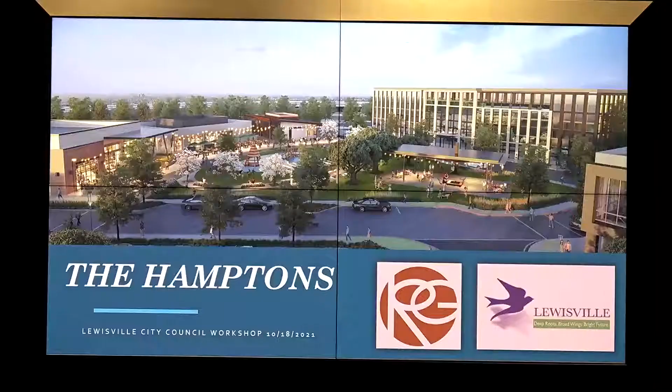The Hamptons, if you guys don't know already, there's a t-shirt going around that says Lake Lewisville, the Hamptons of Dallas, so it's kind of tongue-in-cheek, but it's already got built-in marketing for that.

And the other part of that is, as you'll see with a lot of the developers in this Northern Gateway, they have a desire to tie into the lake and the lake project that's happening just nearby. So on the Northern Gateway, just a reminder to council of all the different projects currently in the works, as well as to the public.

So you probably can't read this very well, but in the blue, that is what council is aware of as Frontera. That is a master plan community that is going to be 759 multifamily units, 201 townhome units, and commercial along the freeway with a nice amenity area with a lake.

You also have on the corner, which I'm not sure council knows about, but we have gotten plans in for a Gas Monkey. What that is going to be is an outdoor amusement facility. They're going to reuse that facility out there with the go-karts and make it even bigger and better. So that will really activate that area from a family entertainment standpoint.

And then obviously we have Heritage Trails, which is the multifamily as well as townhome development, as well as Nora that's going in. In the yellow, we have some future commercial that will tie in nicely with our site. And so that really left us with the site that was sitting right in the middle of all this opportunity.

Now, the problem with that was that after COVID, we had a big spike in prices for industrial property. And so this property was already zoned light industrial, and the owner at the time felt it was in his best interest, even though he had previously taken part in the Northern Gateway plan trying to make this a walkable urban village, decided it might be in his best interest to sell the property for industrial.

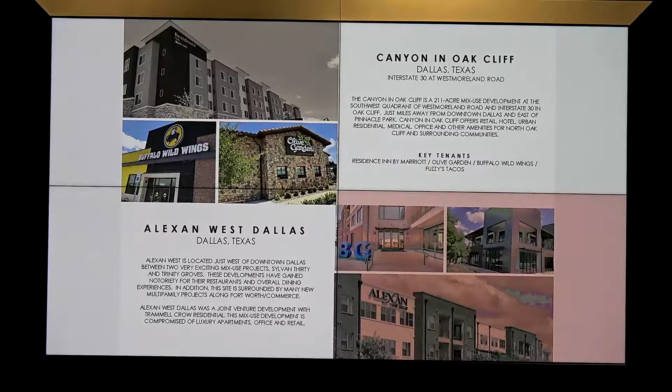Some of the projects that we have completed or that are underway include the one I mentioned earlier, the Shops at Redbird, which is a $200 million redevelopment of the former Southwest Center Mall in Dallas. Glen Oaks Crossing, which is a Walmart anchor center in Dallas. The Canyon is a 211-acre master plan mixed-use development that consists of hotel, residential, restaurants, and retail. The Alexan West Dallas was done in partnership with Trammell Crow, an urban mixed-use development.

Center City is in the city of DeSoto, a Tom Thumb anchor center with some quick service restaurants. Richardson Square is a mall redevelopment in the city of Richardson that's anchored by Target. Eldorado Plaza is located in the McKinney market, anchored by Trader Joe's and a couple of select service hotels. Red Oak Crossing is a Walmart anchor development in the city of Red Oak.

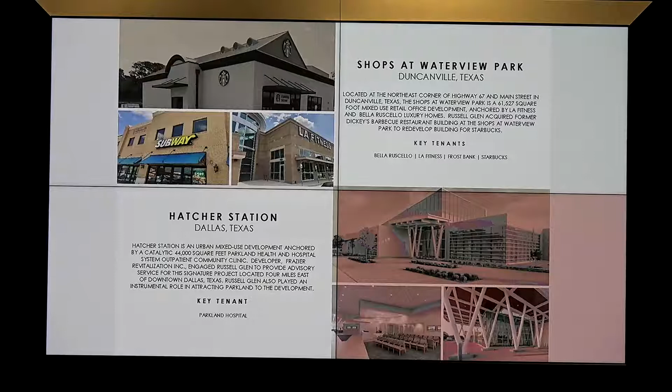A couple more here, then we'll move on to the plan for Lewisville. The Shops at Waterview Park is in Duncanville, a mixed-use development with urban residential, LA Fitness, restaurants, and retail. Hatcher Station is a Parkland Medical Center anchored building. We were partners with Matthews Southwest on the Omni Hotel project in the city of Dallas. And in my previous role, I was director of real estate for Panera Bread and Pei Wei restaurants.

So we have structured a purchase agreement for this property. As council had directed, the desire was for us to find a developer who was qualified and met the vision of council, and we'll go over what Terrence's vision for this property is and get feedback from council. Basically, the idea is we will allow the developer to get all of the entitlements along with the city for the next 365 days, and he would have 2 extensions of 60 days each.

He would have to purchase those extensions, and he does have to pay earnest money on the front end. But prior to closing, the city and developer are going to work together to finalize a master plan, which you'll see the draft of right now, and we'll get your feedback today. Then the city will rezone the property to a planned development district zoning. That will lock in all of those entitlements, but ensure that it's going to be built exactly the way we want it to be built.

The developer -- while the city is responsible for hiring the planning team and the architectural team to come up with the layout, and you'll see that under Donna's signature authority we've hired GFF, who've done work for both of us on this project going forward -- Terrence's company would pay for the traffic impact analysis to make sure they have adequate access to the site from 407, plus a circulation plan and market project. This entire time he's already started marketing for tenants and has gotten quite a few bites currently, and he can talk about a little bit of those.

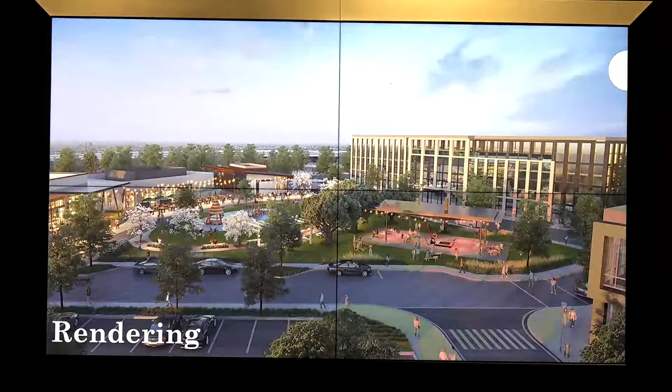This rendering gives you a vision of the green space I was referencing earlier, where it could be heavily programmed with maybe evening concerts, a place where people can hang out and dine. And then you have patios facing back into that area.

What we like about the way the buildings are positioned is it creates a buffer between the interstate and that green space. The way the green space is located from the site plan, it connects to the hotel so you can walk out easily, as well as from the office. And if you're at the grocery store, you can walk across the parking lot to get there.

We had to create a buffer on the corner. There's an easement here you can't build on, so we envision that being a really nice green space with some signage that markets the project. I think that was it.

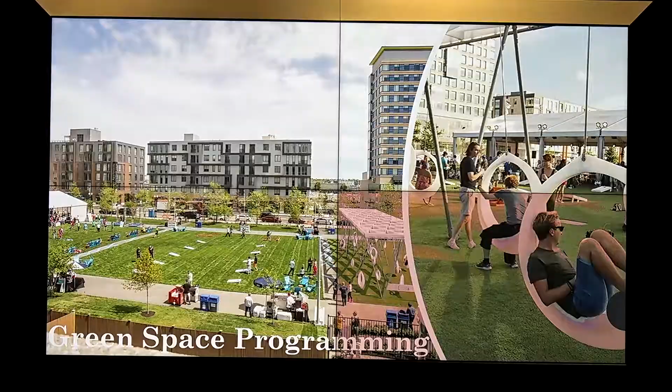So you want to talk any about this? Or you want me — yeah, these are just some ideas. We're thinking about adult swings, which is becoming more popular for people to come out and gather. We have the lawn at Redbird, where we're doing a lot of different programming, like yoga in the evening or fun activities where kids and adults can come out and enjoy themselves.

With that, I also wanted to go back to the master plan and mention to council that this is still a work in progress. One thing Terrence and I were just discussing beforehand is that in the upper left-hand corner there's a sit-down restaurant, with two drive-throughs right in the middle next to them.

We're really putting the drive-through on that hard corner, but taking the sit-down restaurant and buffering it along the street so it interacts with the drive coming in, lining it up with the other restaurants, and probably pulling in some of the restaurants over by the interstate on the right-hand side too, really trying to create that sense of place along the street line.

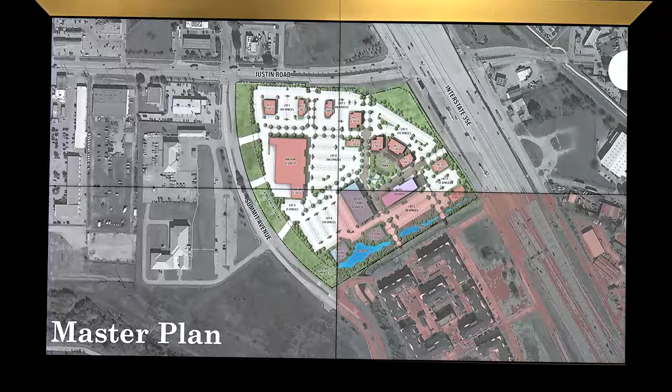So this is still a work in progress. This master plan will come back to council for approval once we're in a pretty good place and feel like it's pretty stable, and it will become the exhibit to our planned development district. But we did want to get input from council, so I'll leave this up here. I can talk next steps after we see if there's any input from council on any of the programming or uses that are out there.

I have a question and a comment. Am I understanding correctly that the darker colored pavement is pedestrian only? Am I reading that right? The one that's in the center? Yeah, around the pavilion and the park area. That's the green space that we were showing on the rendering. So this is that area here.

Okay, but it looks like there's darker colored pavement. Oh yeah, that's around pavement, that's paving to slow down traffic. Okay, so that is still vehicular paving. Vehicular. Okay, so what I think would be really cool is if you could make some type of pedestrian plaza in there that surrounds that park. I think that would be really, really neat.

The other thing is, I love the idea of the swings. I think the rendering is beautiful. I'm really excited about this development.

One thing I wanted to give as input was that I think it's going to be really important for this development to interact with the neighboring developments, particularly because we're going to have so much multifamily and higher density residential surrounding it, which is good for the businesses anyway. I would love to see some pedestrian access points between, particularly this one that's just right next to it.

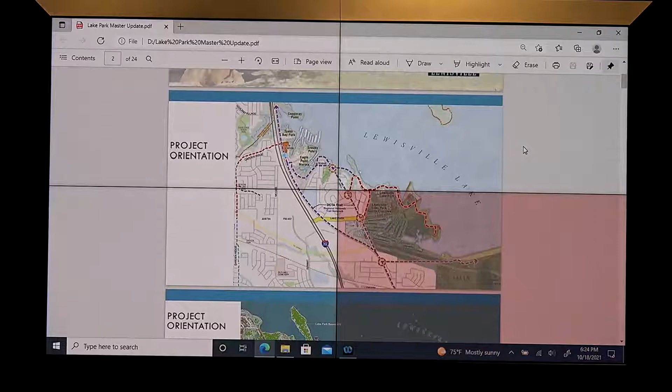So, Mayor, council, park fans—Stacy and I, the Parks and Recreation Director—in November of 2019 we signed a PSA with Halff Associates to start our Lake Park Master Plan, to help us get going on how we would spend the $7.7 million we had scheduled in the bond program to improve the day use and RV campground at Lake Park. Then COVID hit a little bit and slowed us down, but we were able to get back into the swing back last November, late fall, and get some public input and start moving on that.

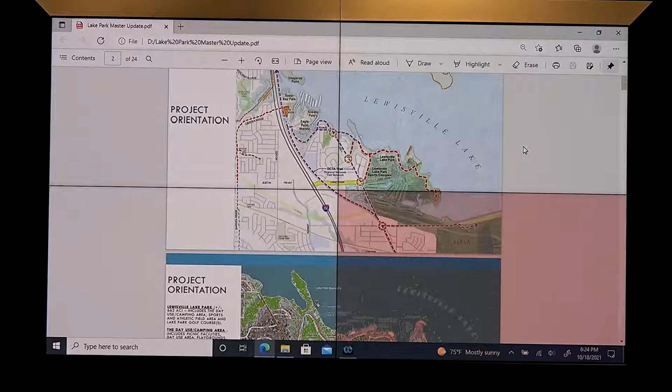We kind of punched the brakes a little bit because we thought we were going to include the marina in this plan. But we had already gone through some significant public input and started working towards our concept. And what we really wanted to do with Halff Associates, what's great about them, aside from Lenny being fun to work with, is they help develop the development guidelines for any property along Lewisville Lake. So they're very familiar with what the Corps wants from us. But they also had a vision of what the entire park system is.

If you'll remember, Lake Park once was our all-in-one park. It was everything we needed for recreation in the community. And then as we grew, other parks developed and filled those needs for ball fields or open space. I liken Lake Park to a house built in the 1950s that was added on in the 70s, added on in the 80s, added on in the 90s, and they all reflect that specific style.

There's really been no master plan for the whole park itself, which has led to issues with how we get into the park and how people use it. We've got Little League and leagues coming for use right at the main entry point, which bogs up how people get into the park for boating or just for day use. There's also no real entry to Lake Park—you don't really know you've arrived at this fantastic asset. So we brought Lenny and his team on to help guide us through that.

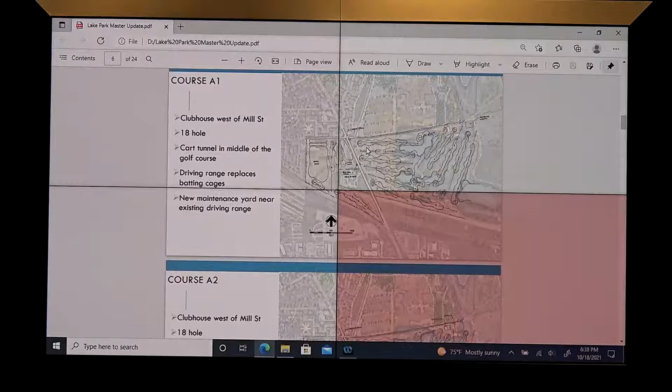But they're also really interested in coming in with a very aggressive tree planting program and ways to help bring in attractors for birds as well as butterflies within the zone. They're really trying to be environmentally conscious with any type of plantings or vegetation that would occur on the redeveloped golf course. They're actually doing this in other parts of the country, and they want to apply that same platform here on Lake Park.

Option 2 is just a little bit different configuration of the area itself, again looking at the holes and other potential realignments there. So before I move on to the erosion control, are there any questions on the overall concept plan?

I have a question. See the day use area right east of the premium cabins, southeast of the fishing barge, between the boat launch? Could you do a pier there, or are all the piers over on the other side?

Absolutely, we could put a fishing pier there. Right now they'd have some type of courtesy dock typically at the boat launch. I've actually seen people fishing there on those big boulders, so by all means we could look at placing some type of pier there.

It would be nice that when staying at one of these premium yurts, there's a pier somewhere close. Absolutely, and those are great opportunities for photo taking and also for fishing. Yeah.

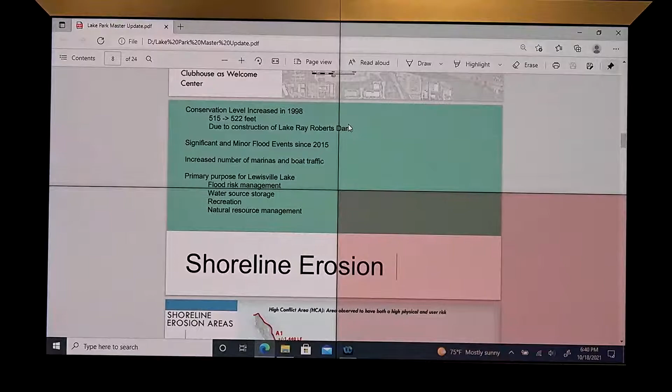So moving on to part 2 of our exercise, part of this is also to look at shoreline erosion. I don't know if you guys have been out there within the last couple of years, but there's been a significant amount of shoreline erosion that's happened at Lake Park. A lot of this is due to the increased water level that happened in 1998. The lake was raised about 7 feet.

Again, this is all due to the Corps' mission of flood control, as well as a water source for the region. Last thing is recreation. So we want to make sure that we're being good neighbors to the Corps and working within their guidelines.

But also since then, there's been quite a bit of significant boats and marinas that's happened over time, and this has caused a lot of wave action. If you have these high sustained rain events, the water's up higher, and you start to see a lot of that bank erosion eating away during these long sustained events. Even some of the vegetation along the shoreline has started to erode away because of those rain events.

As we went through this process, we not only looked at where development may occur from the concept plan, but also what are the high conflict areas, and we started to identify those on Lake Park. We've identified areas in red, magenta, green, blue, and black, but we also identified some areas that really need significant attention because of the erosion happening there.

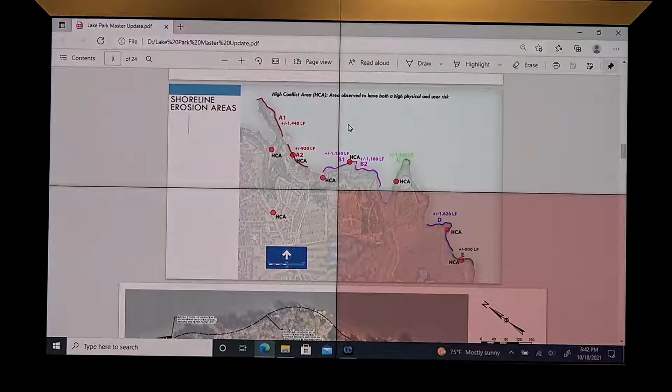These are really areas where water is washing away right now at the boat launch, water is washing away at the road areas, at some of the more inland areas of the lake, as well as areas that are losing vegetation.

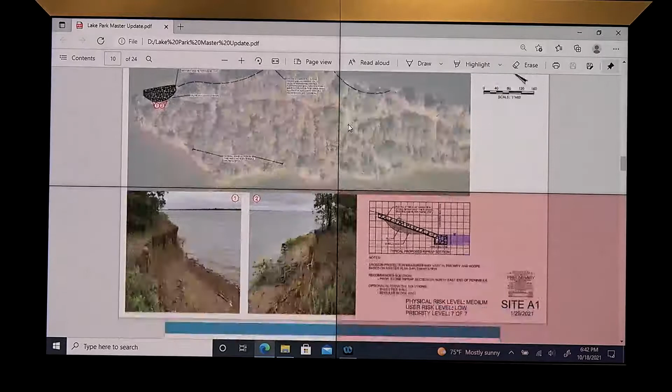As we go around the peninsula, we've got some photos that identify what that erosion looks like. This is on the northeast shore of the peninsula. Photo 1 shows where the water during these high events has started to erode, as well as on the backside, where you're not seeing any significant erosion because it's protected from the land masses there.

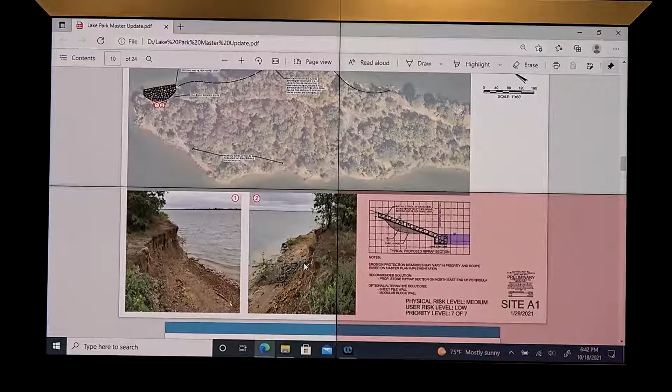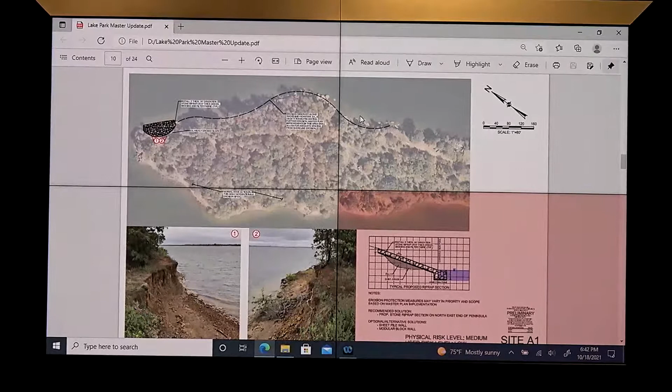We felt it was important to provide some type of erosion protection for this area, but also look at some type of mitigation to preserve and protect those trees to reduce that wave impact happening within that location.

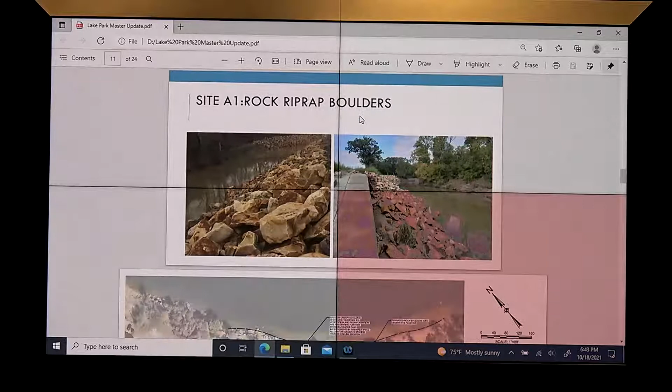Another area here - one example of what could occur is having riprap boulders. We've seen this in other areas of other projects we've worked on. The key thing we've heard is that we don't just want a gray rock or boulder, but something more in tune with the colors happening around the shoreline at Lake Lewisville - earth tones, browns, reds, tans - that would blend in well with the natural stone that's there on the lake.

As we move further, this is the area near the disc golf, and this has seen a lot of impact since COVID. People are going out there, and there's been some conflicts with the golfers and people just wanting to go out there to fish and sit.

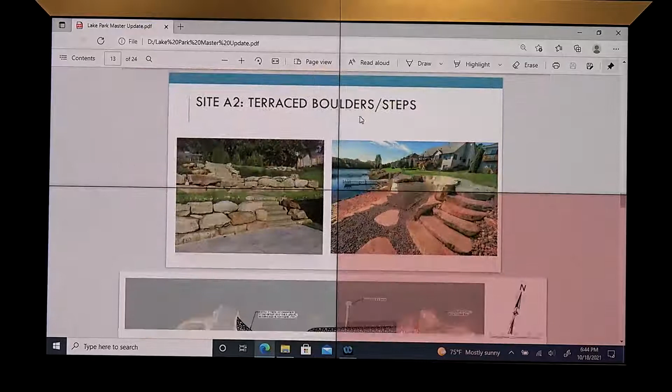So creating opportunities when we developed a master plan - just imagine there's cabins there that back up to the lake, and we're creating some terrace boulders and steps so they can have access down to the water, so they can sit peacefully and enjoy an evening sunset there at the lake.

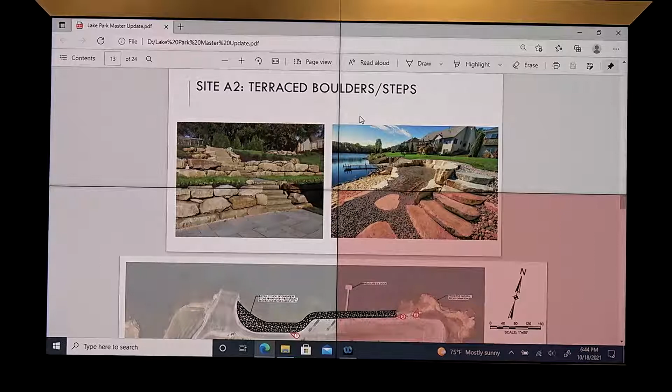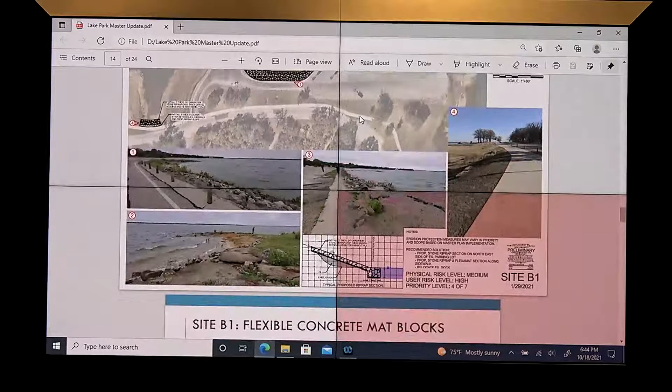As we move further east, this is the area in and around the existing boat ramp, as well as the fishing pier. This has received a lot of protection over the years, and we want to make sure we're reinforcing this area and providing adequate protection along the shoreline. This is one of the areas that gets the most impact, with a lot of wave impact especially during the winter months.

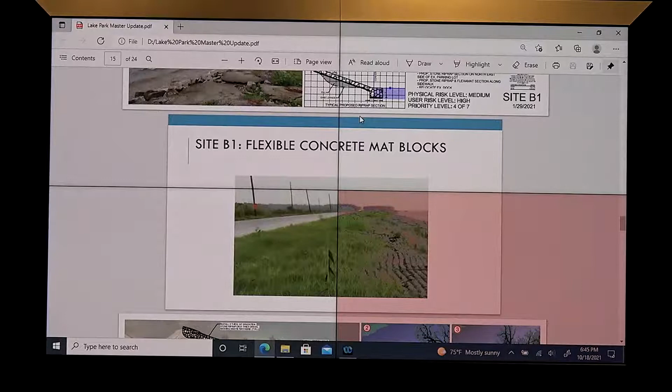So one of the things we talked about is how to provide a green approach, looking at having some type of concrete mats or blocks that encourage vegetation, so it's not just a harsh, rocky environment but more of a green approach there.

Further east of the actual boat launch, this area is receiving a lot of wave action because it's on the point, and we're also losing a lot of valuable real estate and trees along the edge, so we're applying that same type of measure there. One of the things we talked about is maybe having some type of sheet piling that provides a protective edge, so that's something we're going to discuss with the Corps to see if this is the appropriate measure to protect that edge, and what other lakes in the region have done that's proven successful over time.

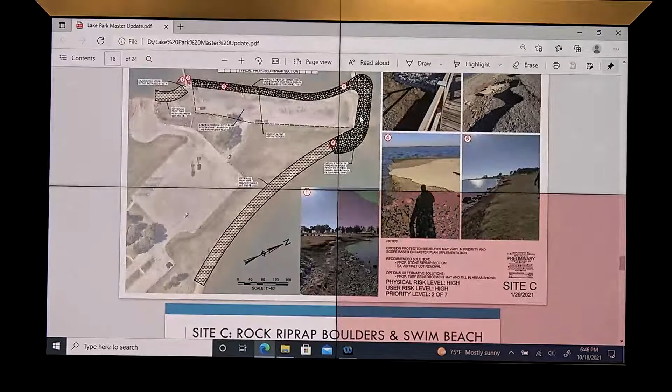So here we're moving further back around the edge. Again, this is the other boat launch area, where the fishing piers would be on the north and eastern edge, and again continuing to provide some type of protection there.

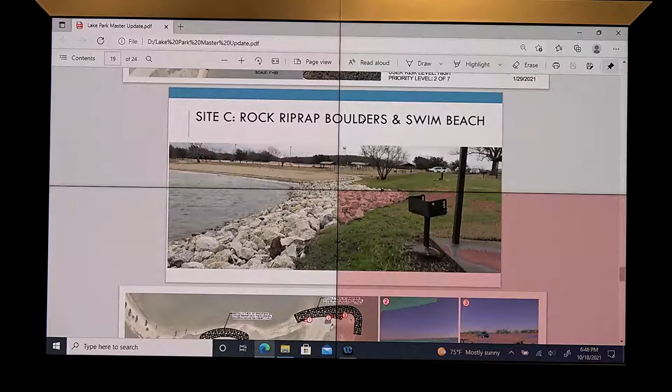This is the area where you may have some of those boulders and rocks, because this is getting some of the heaviest impact, but also making sure we're having that same palette of color for the rock material within that location.

Now this gets more on the eastern edge towards the dam, and again having those areas of protection there. And then finally the area just north of the cricket fields, making sure we're again providing that same level of protection throughout the plan.

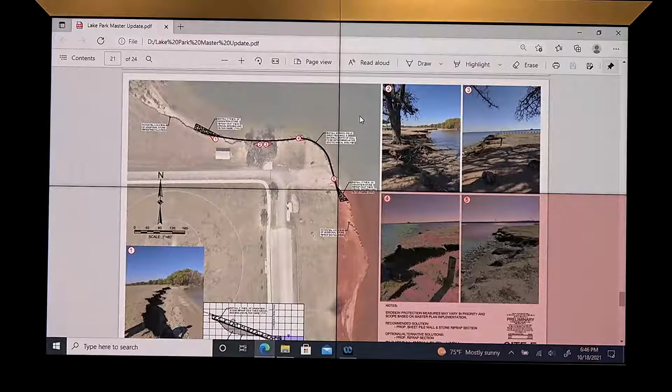So this is kind of our preliminary look at what that would look like, and all of this is dependent upon what direction we go with the overall concept plan. Once we get further input back from staff and further input back from council, we can then define which type of application works best depending on the potential use or zone for the park.

So at this point, I'd like to turn it over to Stacy to talk about the fishing barge and marina.

Mayor, do you need to go through the agenda, or do you want me to? Yeah, I keep going. I was going to ask if I could just pause for a second. We're going to go back to item A just to see what we've got for time here.

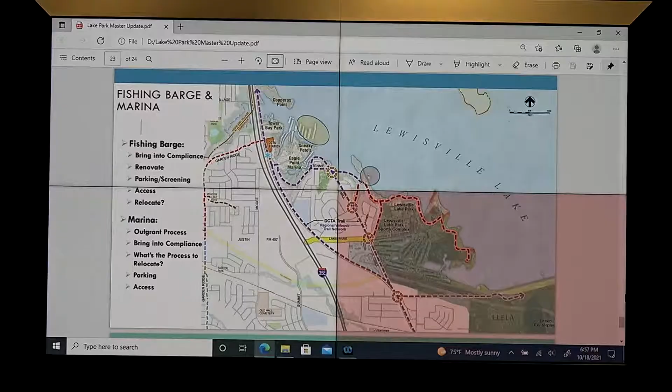I think we're going to issue an RFQ to find some developers to help us do that and bring those places into their full glory, because they're both very vital to Lake Park. And remember, Lake Park is all of that—it's not just the day use area. It extends north all the way to Tower Bay. So making sure we come up with a plan that works seamlessly is going to be important, and finding a developer who can help us get there is going to be important.

So our next steps, if you're comfortable, are to move forward with refining the concept plan we showed you today, finding a way to integrate the marina and fishing barge into the ultimate plan, and work with the United States Army Corps of Engineers to approve the plan, because that will be the basis for our lease extension for 2025. We have to have this done in order to negotiate that lease agreement.

Just things to remember: we issued the $7.7 million tranche for the bonds that should address the Lake Park day use and RV campground this year. So we'll need to start moving towards solidifying this plan, getting construction documents, and spending that money in accordance with the timeline so that we don't compromise our bond rating.

And erosion issues are going to be a big thing we need to address, because we've got to protect that base asset. It's maybe not the sexiest of things in the plan, but it's one of the most important. We really need to work together to identify the resources to get us towards realization of the plan.

We've got future bond initiatives where we said we wouldn't go out for park stuff, but we might look at streets and trails and those—that will be a big component of this. And then we could probably integrate it into the 4B capital plan. It is not there right now, so we'll need to talk about what those priorities are, and as we work our way through the overall master plan, we can do that.